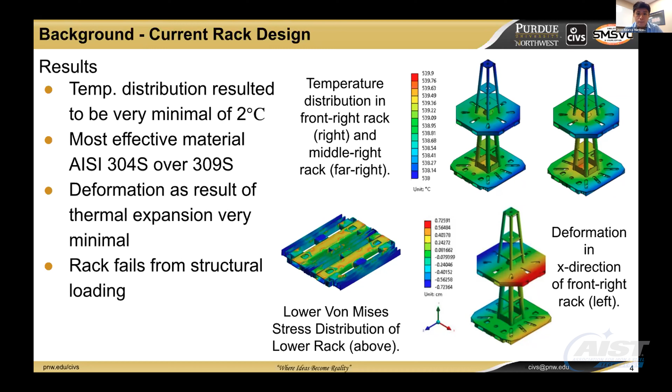The approach for this project was an iterative approach. We start out by doing research, literature, analyzing the models in order to identify the areas of improvement and consider the constraints of the furnace racks. We then develop ideas for improvement, followed by creating the geometry, generating the mesh, and applying boundary conditions.

Then we tested those ideas individually through thermal simulations and structural simulations, and finally did a fatigue analysis. We then examined how those ideas perform all together to create our final design and adjust changes based on the performance of each design.

The method used was brainstorming ideas after the constraints were considered. Some of the constraints included the size of the furnace. We did not want to make the racks taller, or we did not want to increase the weight of the racks because it will use more energy in the furnace.

So some of the ideas we considered was changing the hole distribution as seen in the figure on the screen. We considered applying a shaft structure to the top, changing the platform configuration, increasing the beam thickness, and yes. So now this method generated 12 design ideas, which led to 25 FEA simulations for each individual change.

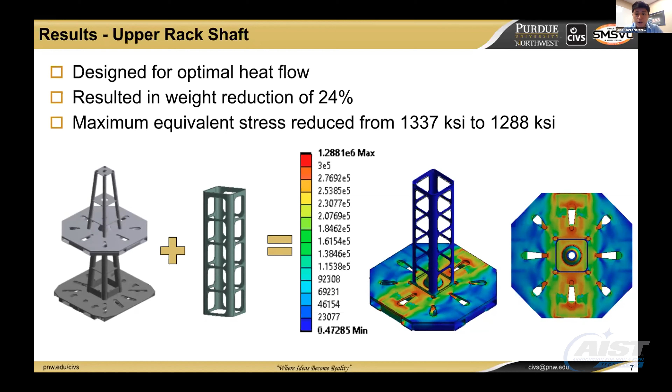Another design was changing the upper rack hole distribution. Now, this design also was focused on improving the airflow through the rack since it's at the top. This design resulted in a 1.8 weight reduction and reduced the stress significantly from 1300 KSI to 1100 KSI.

Another impactful design for the upper rack was adding holes to the lift beam. Now, adding holes was also intended to increase airflow. This did lower the weight of the rack by 2.5%. Even though it increased the stress, we're still reducing the weight and improving the rack overall.

Now I'm going to pass it over to my partner, Joe Madrigal, who's going to talk about the changes we applied to the lower rack.

Hello, everybody. So to continue on some of the ideas elaborated, one of the ideas we wanted to include was an increase in plate thickness on the lower rack. Now, we did do this with an additional 0.1 inches, but we found the relationship that as we increase the weight, the stress reduces. So weight increase is a problem because it increases the cost.

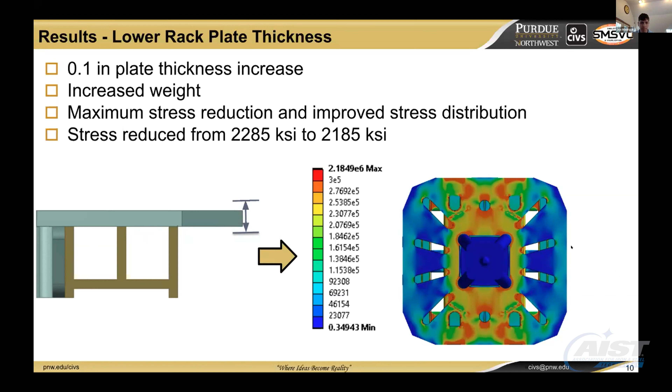And again, as elaborated before, we also added the hole in the lift beam idea to the lower rack, which did reduce the weight in the individual lower rack, just as it did for the upper rack, but it also decreased the maximum stress of the lower rack from 2300 KSI to around 2000 KSI.

And the last idea we also included was a change in hole distribution. We really made this idea to allow more heat flow going through the rack, as well as possibly allowing the stress distribution to be less concentrated. And even though it slightly increased the weight by 0.9%, we did have a very notable stress reduction, which essentially distributed the stress evenly in critical areas where failure is common, as reported by the engineers in the industry. And this change also reduced the max stress from around 2300 KSI to 2000 KSI.

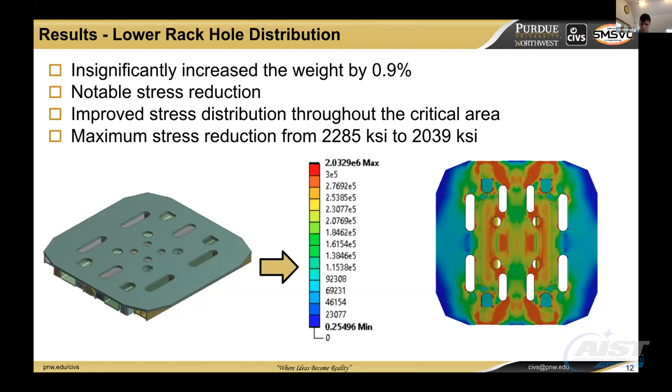And here we have just a summary of all the design ideas. What we did was, after taking all the design ideas into consideration and finishing their simulations, we determined whether they passed the criteria, which we deduced were the criteria for having the most effective design, again by approval by the engineers in the industry: the reduction in metal, the distribution of stress concentration, the reduction in the stress reading, and also, if possible, allowing for more heat flow, as shown in the images. In addition, more ideas are as follows.

But overall, we were successfully able to create a final design that allowed for more heat to flow through the plates, as well as distributing the stress across the racks, specifically the lower rack, which again is where failure commonly occurs. And in addition, we also minimized the weight, specifically in the upper rack, which again linearly affects the increase in stress in the lower rack.

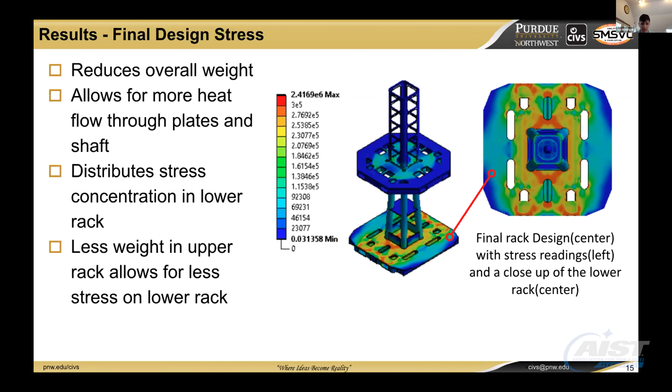And to perform a fatigue analysis, we wanted to see the performance across the entire rack for how many cycles each part would show before failure. Even though there are some areas, such as the corner of some holes that you can see in the lower rack to the left, there are some critical stress areas in the notch areas. But overall, compared to the original, this did have a significant cyclic increase to allow the rack to survive more cycles, broadly speaking.

But in conclusion, the students were able to successfully examine the original design on a part-by-part basis using finite element analysis. And after designing multiple design changes, we chose the best performing changes that made a suggested design for the industry. And this design was able to contain lighter mass, distribute dense stress areas where critical stress occurs, and allow for more heat flow to go through the rack.

Now, as for future work, we really recommend that some of the researchers that work on this project further potentially use a computational fluid dynamics simulation, which is a simulation that could show the heat flow throughout the rack, because in the actual furnace, the heat flows from the top of the furnace all the way through the rack down past the lower rack. So if that could be simulated, that would be extremely helpful.

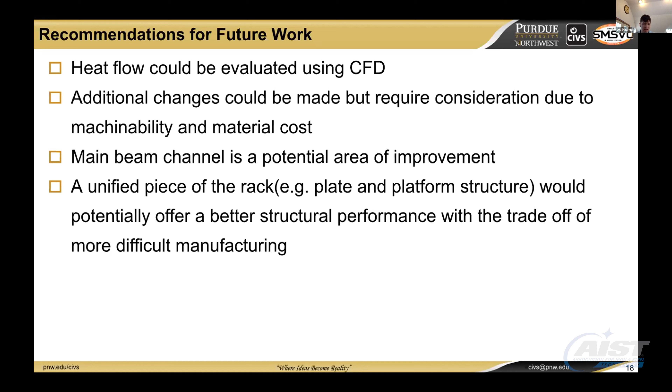And we also like to note that some ideas, such as a unified piece of the rack or the plate and the platform structure, showed that it potentially had an extremely improved structural performance, but the trade-off is that the manufacturing is going to be essentially more difficult with material costs, and just being realistic in that case.

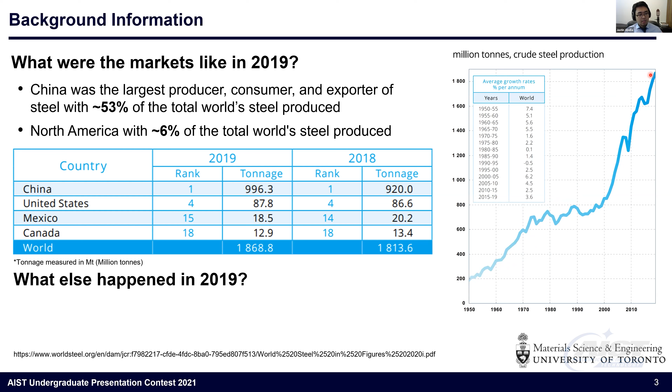On the right, you'll see a graph of the crude steel production from 1950 all the way to 2019. So from here, you see that as population grows, as projects begin to expand, the demand for iron and steel is obviously going to go up. Little bumps in the road, but you can see this ascending nature of the iron and steel market from 1950. But what else happened in 2019? December 31st, 2019, as you all know, the first case of COVID-19 was reported in Wuhan, China.

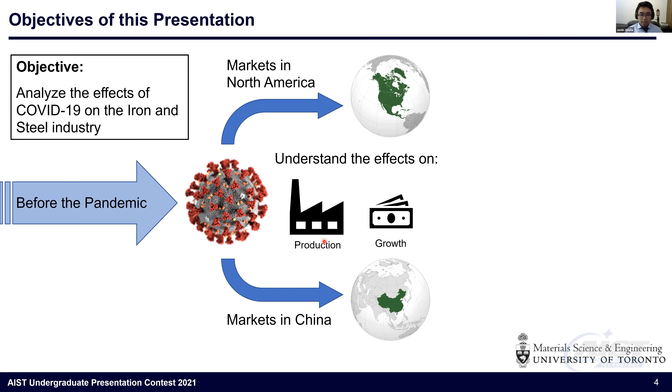So my objective of this presentation is to analyze the effects of COVID-19 on the iron and steel industry. I went over what it was like before the pandemic, talking about the markets before 2020. And obviously the virus had hit. Now I'll be going over the markets in North America and in China just to scope down a little bit. We want to analyze the effects on production and growth. And most importantly, how have the countrywide lockdowns affected steel production and growth? From there, I'll talk about the world scale, and then lastly, the future of the industry. And with that being said, let's move forward.

Start off with China. What was the production like in China? Well, there was a fall of production by minus 8.4% in February 2020. You can see this little dip over here. The average levels of 2019 were just about at this level before having a smaller little dip over here. But the full productivity of China had already recovered by April 2020 and is even higher than the 2019 levels. In terms of growth, there is a little bit of variability with a decline of 6.5% in February 2020, but by October of 2020, that has already grown to about 12% year-on-year growth.

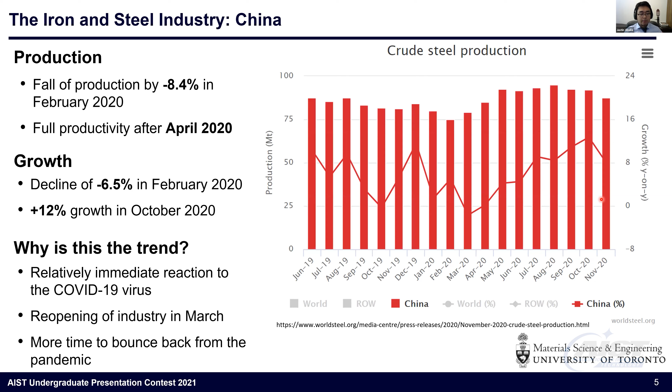Now you can ask yourself, why has China recovered so quickly? Well, if you recall from last year, China had a relatively immediate reaction to the COVID-19 virus. They shut down their economies and their country very early on in January and February 2020. This allowed them to reopen their industry in March, giving them more time to bounce back from the pandemic.

Now, comparatively, let's look at North America. What was the production like in North America? Well, you see there's a 33% drop in the second quarter of 2020. And I added this little table showcasing the 2019 and 2020 million tons of steel produced in that time. But more importantly, I want to bring your attention to the graph on the right.

Now, you see that the United States, being the bigger, the more impactful producer of steel in North America, you can see this obvious drop in March, April 2020. You can see this is the 33% drop. Now the growth here is a minus 15.7% decrease in year-on-year growth.

And again, you can ask yourself, why was this the trend? Well, a slower reaction to the COVID-19 virus delayed the openings of the markets, delayed the opening of key steel plants. There was also a sharp manufacturing recession in the US around the time, and companies like Ford and Honda closing their doors to prevent the spread, to encourage social distancing. This has caused that drop of iron and steel around this time.

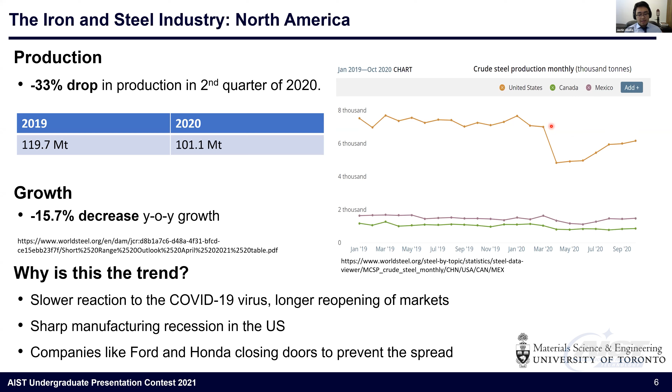I think it's important to note what the World Trade Organization is reporting around this time. You can see that global trade fell by minus 5.3% in 2020, hitting a low in Q2. It's obvious when you see this rising trend over here, versus this immediate fall in Q2 of 2020. But there's a steady increase, and I wouldn't even say steady, I would say a rapid increase after April 2020 in the third quarter of that year.

So you can see that trade has obviously been correlated to the iron and steel markets around that time, and this recovery is very analogous to the iron and steel markets. Now you can see this dotted line as the forecast, and it is also in this ascending pattern. So we can expect an early recovery from the iron and steel markets.

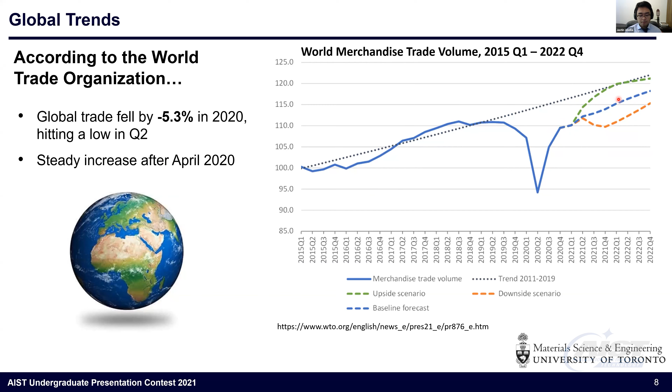So let's go over production again, this time on the global scale. There's a minus 2.8% decrease in production, and you can see this is clear with this drop from March to April. Just a little note that I have included the graph for the rest of the world, not including China, because China is such a large producer, such a large chunk. So it gives us a bit more perspective on the rest of the world if we don't include China in this map.

But again, as I was saying, there's this obvious drop in March to April 2020 with a steady increase after April, this steady, ascending nature. Now the growth has seen a minus 30% drop from February to April. Again, very obvious. Start from here, goes down, a minus 0.2% year-on-year growth at the end of 2020. But again, this ascending growth, and already at the end of the year, we see more of a positive year-on-year growth over here.

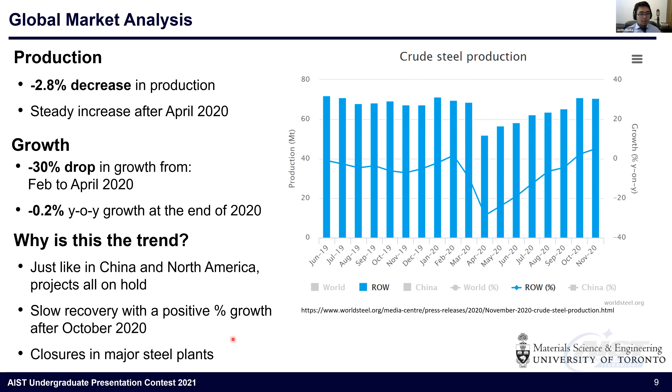Now, this is a trend as countries reopen their economies in the third quarter of 2020. We see a slow recovery with positive percent growth after October. But even so, there have been closures of major steel plants around the world. I've added a few of these steel plants that have closed their doors to encourage social distancing and to limit the spread: British Steel, Tata Steel, Nucor. But there are reports that in 2021 we will see a recovery in new capacities at companies like Nucor, Steel Dynamics and Big River Steel in North America.

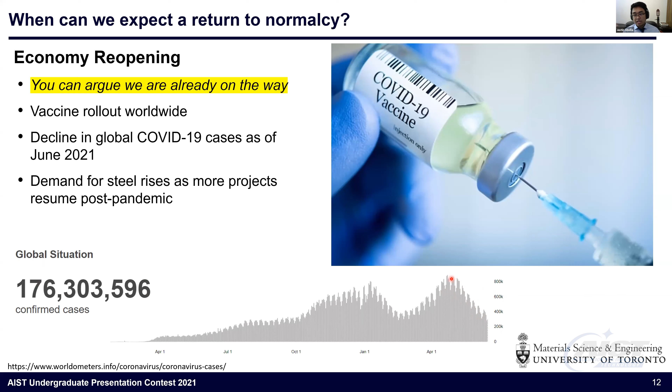So when can we expect a return to normalcy? Well, I would argue that we're already on the way. You've seen the rise in global trade. You see the rise in production and growth. As vaccines roll out worldwide, the world will continue to reopen, and global COVID-19 cases as of June 21 have been declining. Obviously this is a tragic event, but we are seeing a lowering of global confirmed cases. And with this, as more projects begin to open and resume post-pandemic, the demand for steel and later the production of steel will continue to rise again.

So with that being said, let's give a little bit of a summary of what I went over today. So in China, we have a max fall of production about minus 8.4% in 2020, a decline of minus 6.5% in year-on-year growth in February. But we know that because of these early lockdowns, markets reopened a lot quicker. That allowed them to produce steel at a more normal rate than the rest of the world.

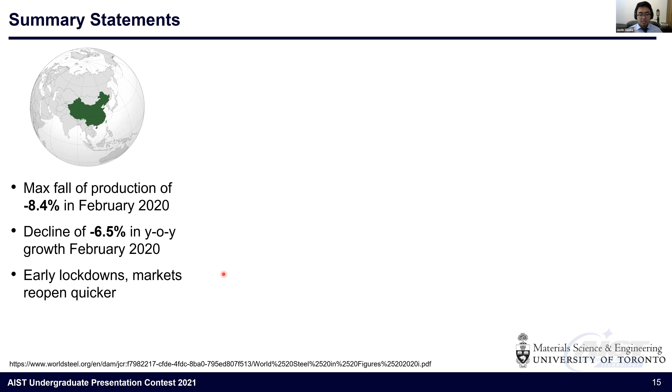In North America, we saw this 33% drop in production at the start of the lockdowns, and the recession in March caused much unemployment and closures in industries that require iron and steel, kind of lessening that demand for iron and steel. And obviously with lesser demand, there's lesser production. And the delayed lockdowns delayed the opening of the economy.

But on the world scale, we see a minus 2.8% decrease in global steel production, a minus 5.3% decrease in global trade. But with all of those graphs, we see a slow recovery in 2021 as markets begin to reopen again. So some key conclusions here is that the COVID-19 pandemic has obviously caused a decline, and that the industry is recovering as these sectors that demand iron and steel, such as construction and automotive industries, reopen their economies again. And we also have maybe a projected V-shaped economic recovery.

What does that kind of mean? Well, I'm going to bring up this sort of chart again, and this one is updated to 2020, not 2019. And you can see as population grows, the demand for steel grows, and there are always bumps in the road. It goes down, but it always rises back up. For example, right here is the 2008 financial crash with this dip, but obviously it goes right back up, this V-shaped recovery.

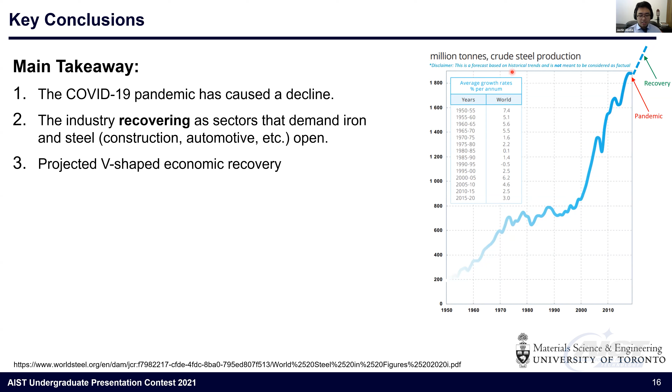Now right here, we can see this obvious little dip or this little stagnation, and it can be predicted that this stagnation is the pandemic, whereas the recovery, as it has been in the history of the human race, at least since 1950, will see a growth once again. And just as a disclaimer, this is a forecast based on historical trends and is not meant to be considered as factual.

And I just wanted to end off with a little saying from the Iron and Steel Mills and Ferroalloy Global Market, that the COVID-19 pandemic was obviously an unforeseen event that did halt the iron and steel industry. But these shutdowns are not at all related to any ongoing fundamental weaknesses in the market or the global economy. And we can see that with the growth, with the recovery of many of the regions around the world. And because of this, hopefully we will see the industry thrive once again.

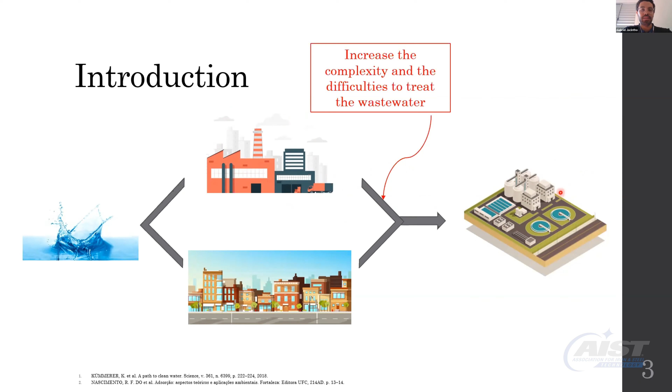It was common that a central sewage treatment plant was used to treat all the wastewater from the industries and from the cities. This is not good because the complexity of the industrial wastewater increases the difficulty to treat the water and release better quality water into the environment. In this example, the industrial wastewater is treated inside the plant and the final results are quite better.

Siderurgical industries use boric acid as a lubricant in the mechanical conformation process and chrome in electrochemical baths to increase mechanical resistance and avoid corrosion in the steel. Even after regular wastewater treatment, these substances can be found in trace concentrations in the treated water. Removing these trace concentrations is really hard and new technologies are necessary.

Chrome is well known to be carcinogenic when ingested, and it's bioaccumulative. In other words, after ingestion, it accumulates in the body tissues. Boron, for example, if it's in high concentrations in the soil, can cause deformations in plants and necrosis, and can even devastate an entire plantation.

To avoid such situations, governments around the world started to create laws and rules to better control the destination of wastewaters. In Brazil, for example, CONAMA, the National Environmental Council, limited the concentration of these substances allowed in the wastewater after treatment. Total boron is allowed only below 5 ppm. Trivalent chrome is allowed only below 1 ppm, and hexavalent chrome only below 100 ppb. The lowest value for hexavalent chrome is because this kind of chrome is known to cause carcinogenic effects.

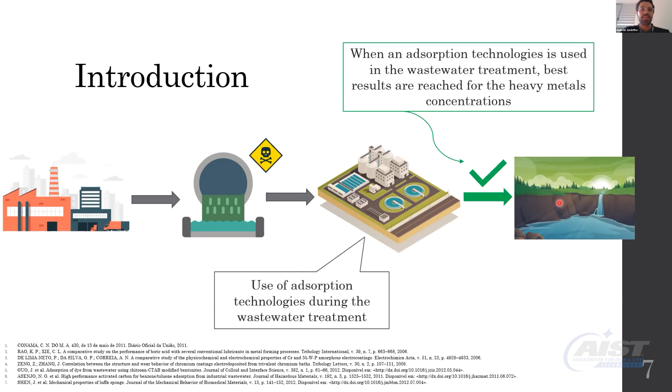Removing substances present in trace concentrations, as I said, is hard, and adsorption is a well-known method capable of such a thing. Here is an example of possible use of adsorption technologies for the treatment of wastewater. Inside the treatment plant, it's possible to use filters with adsorption technology to remove the trace heavy metals in the water and release that treated water to the environment. Here is a quick review about adsorption.

Adsorption is the interaction of a substance called adsorbate with the surface of a solid known as adsorbent. These interactions happen by physical interactions in the case of physisorption, where the adsorbate molecules get in proximity to the adsorbent, and then by difference of electric charge potential, they form multiple layers on the surface of the adsorbent. They can fill the pores too and get into the adsorbent structure.

But there is a possibility of chemisorption too, where a vacant binding site reacts chemically with the adsorbate and holds it in a unique layer on the surface of the adsorbent. It's possible that both kinds of adsorption occur. First, the adsorbate chemically reacts with the vacant binding site. Then, by physisorption, other layers can be formed and fill the entire pore.

The adsorption efficiency can be improved with treatment made on the adsorbent surface, a process that we call functionalization. One interesting property of adsorbents is that it's possible to recover the adsorbate through a process called desorption. Then you can use the same adsorbent again.

Adsorption with coal and clay is widely used. Even inside our homes, these materials are used, such as in water filters. This is an example of a clay water filter filled with activated coal to filter the water here in Brazil.

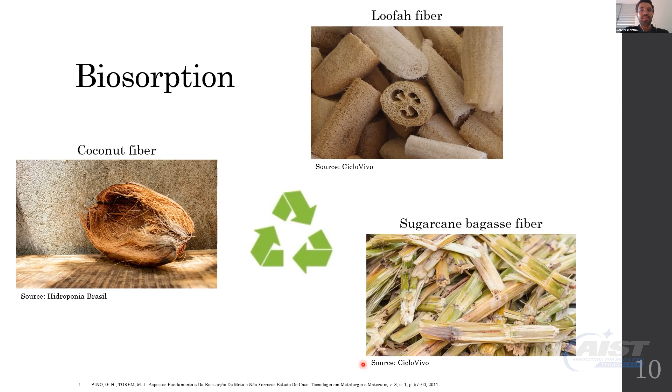In this example, coconut fibers were used to adsorb heavy metals present in water. Coconut fibers are composed of 23 to 43% cellulose and 35 to 45% lignin, and this composition is very important for the adsorbent characteristics.

A study of the zeta potential variation at different pHs was performed to evaluate the charge behavior on the coconut surface. At high pH values, the values tend to fall, showing that there is an accumulation of negative charge on the surface of the fibers. As you can see, the lignin and cellulose molecular structures have a great amount of hydroxyl groups.

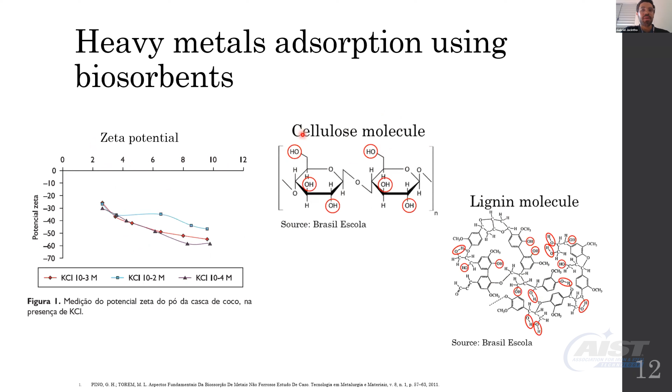These hydroxyl groups tend to lose the hydrogen at higher pH values and consequently stay with an unbonded oxygen with a negative charge. In theory, this negative charge should attract metallic ions present in wastewater to the fiber surface.

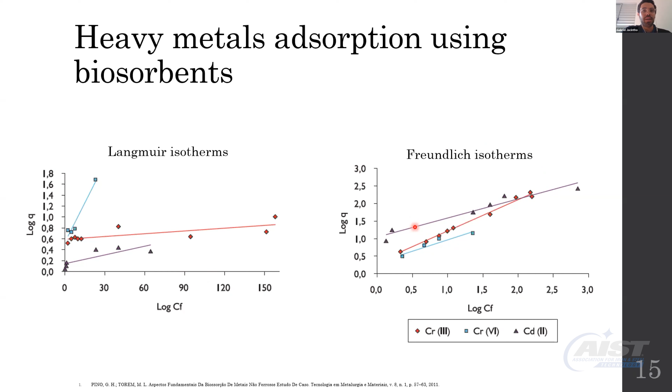Now, talking more about the loofah, principally the Brazilian sponge gourds, we found that the composition of the Brazilian loofah is close to the coconut fibers. The composition is based on cellulose and lignin. And these structures allow the surface chemistry to be changed, increasing the adsorption and selective capability.

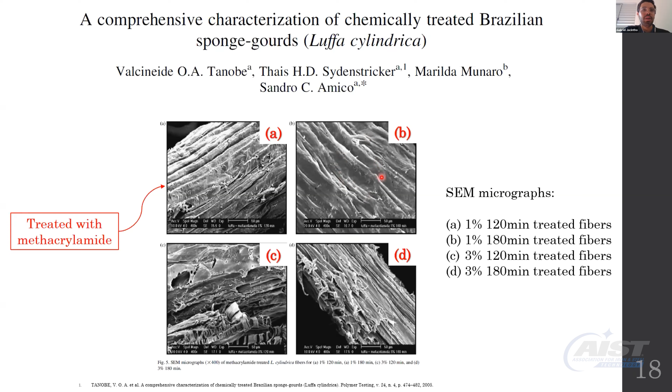And with low concentrations and 180 minutes of treatment, the surface of the loofah fiber starts to be smoother, which is good to attach another kind of chemical compounds in the surface to increase the adsorption capability.

The goals of this project are the functionalization of the vegetal loofah by the alkalinization and impregnation of citric acid to improve adsorption capability for boron and chromium of the steelmaking industries. So we plan to do the evaluation of the vegetal loofah adsorption capability in its natural state, the functionalization of the vegetal loofah by alkalinization, impregnation, and the characterization

and evaluation of the influence of the pH in the boron and hexavalent chromium adsorption. This last is very important because it's difficult to control the pH of the wastewater in the industries. So providing an adsorbent that's able to work in that pH range is very important.

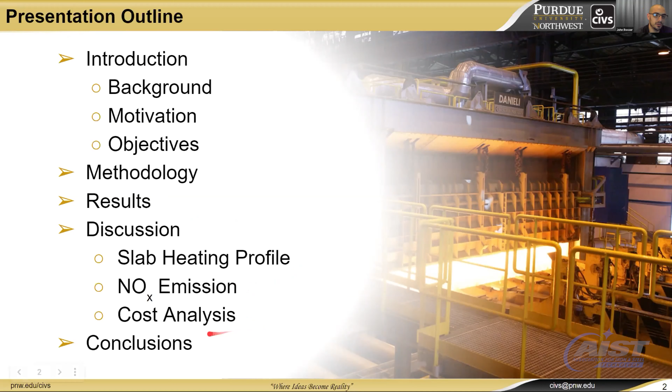Now, in 2019, the US steel industry created 87 million tons of steel, which equates to $92 billion worth. Our project focuses on the reheat furnace portion of the steelmaking process, which heats slabs so that they are more ductile so that they can be rolled down to the desired size. This is the second most energy demanding step, consisting of approximately 36% of the energy of the entire process, and equates to 24.5 megajoules per kilogram of steel.

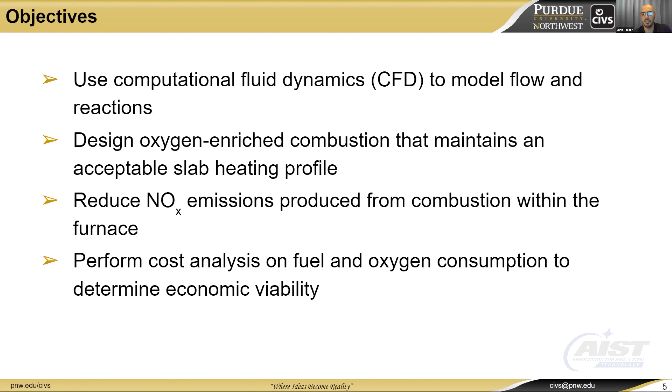We want to reduce NOx emissions produced from combustion within the furnace and perform a cost analysis on the fuel and oxygen consumption to determine the economic viability of oxygen enrichment.

We first started conducting the literature research that guided our decisions. We used ANSYS Fluent CFD software to create a 3D steady state model utilizing the K-epsilon turbulence, species transport, eddy dissipation, and discrete ordinate radiation physics models.

The geometry for our furnace was supplied to us from previous CIVS work. The slabs in this furnace are moved through the furnace by a walking motion of rotating arms. This makes this type of furnace a walking beam furnace. It has 5 zones: a preheat, heating zone 1, heating zone 2, intermediate zone, and soaking zone.

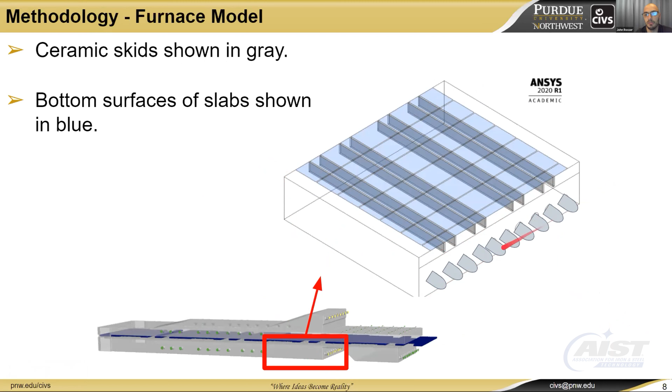My partner and I focused on modeling the bottom intermediate zone of this furnace. The ceramic skids that the slabs rest on are shown in gray, and the bottom surfaces of the slabs are shown in blue. The tabs along this portion of the furnace represent the location of the burners.

We placed oxygen ports in between the burners because the existing burners cannot be modified. And geometrically it made sense to place them in between the burners so that we could try to have even heating of the slabs. The port size is dependent on the oxygen enrichment and fuel percentages.

Oxygen is also injected at sonic speed because we want the reaction to take place deep into the furnace and away from the burners. And we also want to keep our oxygen fuel ratio constant. Now, these constraints are important and determine the diameter size of the ports. So my partner and I created a MATLAB script to calculate the diameter for any given oxygen enrichment percent and fuel percent.

So we studied 8 cases. The first case is a baseline case, and the cases are defined by the O2 mass percentage of oxidant and the mass percentage of the original fuel. So in case 1, the baseline, 21% O2 mass percentage just represents that we're injecting air into the furnace. 100% means it's 100% of the fuel compared to the baseline.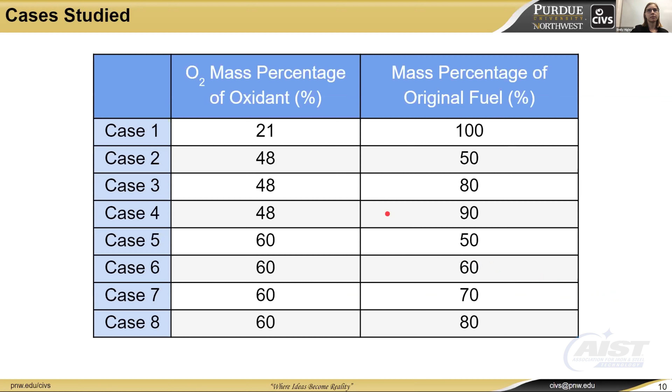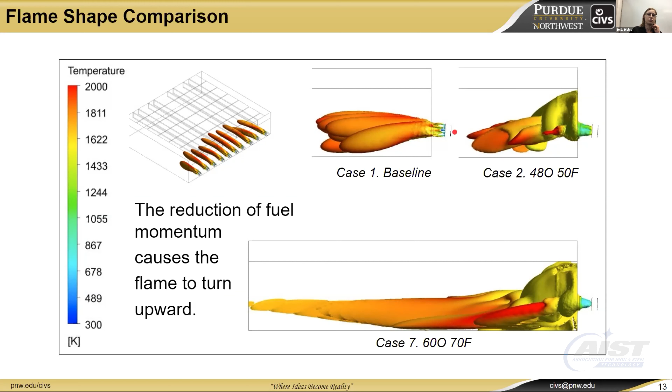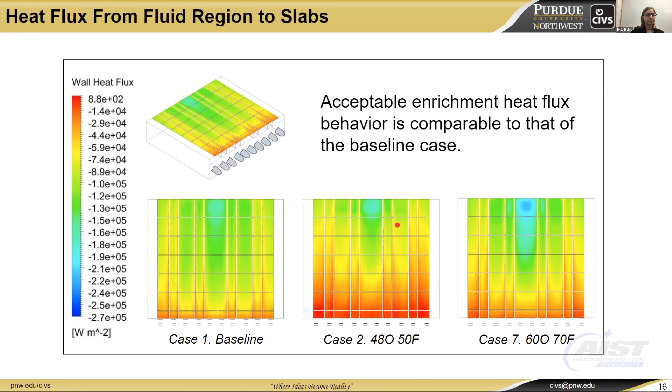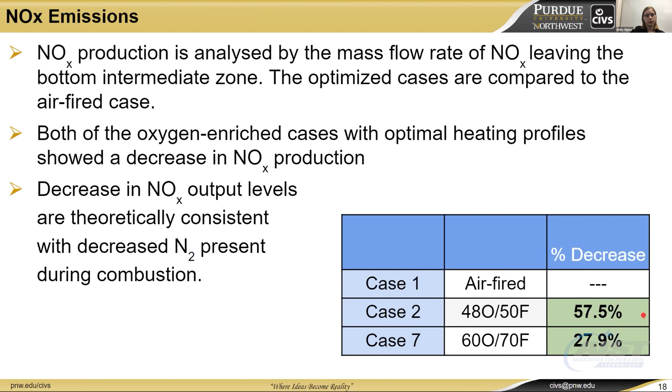So for NOx emission, the main thing to note here is that for oxygen, a larger percentage of oxygen is included in the oxidant relative to nitrogen, which means that there is less potential for NOx to be produced simply because there is less nitrogen. And as we can see, based on our simulations, less NOx was produced in both cases 2 and 7, with the greater decrease occurring for the lower enrichment level.

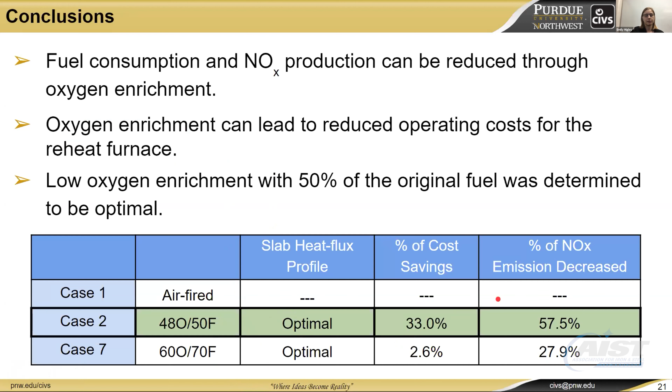And this table summarizes cost savings and NOx emission decrease so that we can see that the low enrichment case was found to be optimal based on our simulations. So in conclusion, fuel consumption and NOx production can be reduced through oxygen enrichment, and this can be conducted in an economically viable manner. And lastly, based on our simulations, the optimal approach to this is a low enrichment level with 50% of the original fuel, leading to an estimated 33% cost saving and 57.5% decrease in NOx emissions.

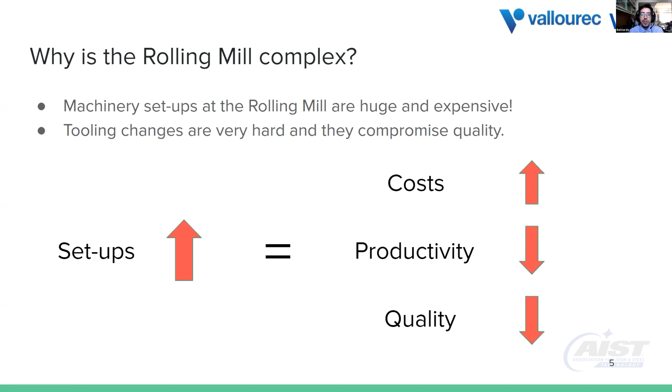So am I really saying that we're going to use Charles Darwin, balls and arrows, computer programming, and ourselves to create this result in one of the most challenging environments in the company? Well, yes, and now I'm going to show you how.

So the first thing we should be aware of are some specifications of the seamless steel tube. Some of the main visible specifications of the tube are its length, of course, its outside diameter, which I'll call OD, its inside diameter, which I'll call groove, and the wall thickness, which is the difference between the OD and the groove. The OD and the groove will be the most important specifications for us, and they will impact directly our result.

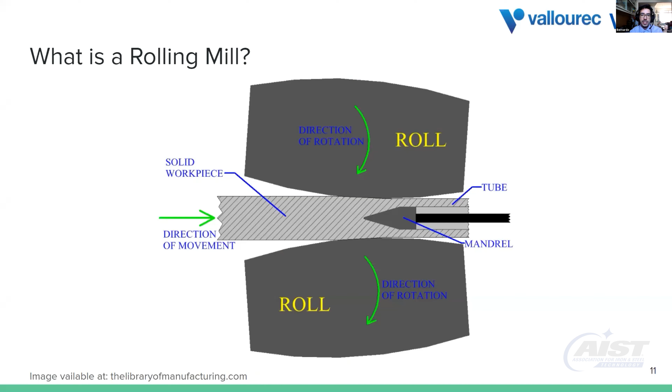In the rolling mill, there are those very important and also very expensive tools called stands. The stands are tools that come outside of the tube to maintain its position, and they are specific to the OD and to the groove of the tube. Meaning, every time we sequence consecutively two orders, two tubes that don't have the same value of OD or the same groove, then we have a huge setup. We have to change the stand, and we lose all its remaining lifespan.

So every time we talk about sequencing consecutively, we're talking about production scheduling. Production scheduling happens when we have a make-to-order approach in which all orders shall be scheduled, let's say in a month. So the task is to determine the best sequence of orders to be processed.

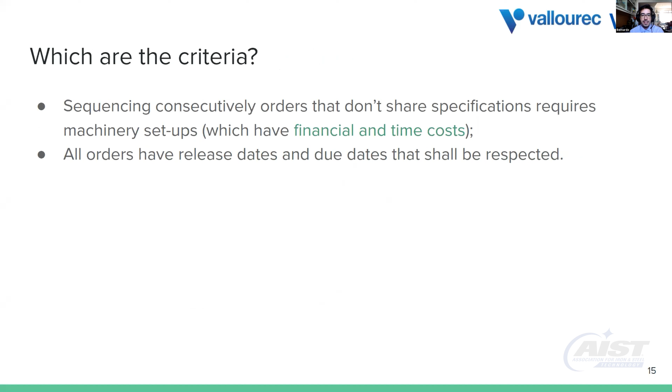But what is it that determines which sequence will be the best? Which are the criteria? Well, sequencing consecutively orders that don't share specifications requires machinery setups. As I've said, machinery setups have financial and time costs. But the thing that really complicates our situation here is that all orders have release dates and due dates that shall be respected.

So let's take a look at some balls and arrows, as I've called them, or nodes and edges. Let's imagine that we have two green nodes that represent the orders O1 and O2. They have an outside diameter of X. And let's say also that we have two yellow nodes, O3 and O4, that have a different outside diameter, let's call it Y. So if we sequence those nodes in this manner, O1, O3, O2, and O4, every time we change the color in a sequence, we have to make a setup. We have to change the stands and change lots of other specifications of machinery. So we have three setups in this case.

But if we rearrange the nodes in this manner, O1, O2, O3, and O4, we bring together those which share color or the outside diameter or the groove, some specification. Then we only have to do one setup. So this is good for us.

And the same is true for the case of the tools. If we use the previous sequence, O1, O3, O2, and O4, we have to use 4 different stands, one for each order that we sequence. And then we'll lose 4 remaining lifespans. Each time we change a stand, we lose all its remaining lifespan. But if we, again, bring together those nodes with the same color, then we will only use 2 stands, one for each color, and in the end, we only lose 2 remaining lifespans.

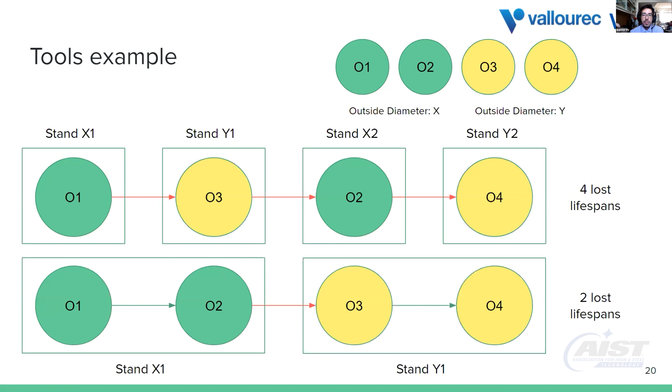But as I've said, the due date is really what complicates our situation. Let's imagine that each order takes a day to be processed, and we have the following due dates. The green nodes are due on day 4. And the yellow nodes have tighter due dates: day 1 and day 3. So if we schedule these orders in this manner, we'll respect the setups and the tools requirements. We'll have the optimal solution for them, but we won't be respecting the due dates of the yellow nodes.

If I change the way we order the colors, we can produce the yellow nodes first. They will respect their due dates, and also the green ones will respect their due dates. But that's not quite what happens in reality. It is far more complicated than that. One example: imagine if this O1 green node doesn't have day 4 as its due date. If it has day 2 as its due date, then it is simply impossible to get the best setup scenario and respect the due dates, because I want to do O3 on day 1 and O1 on day 2. But if I want to optimize the setup, then I want O4 to be close to O3. And this happens a lot of times.

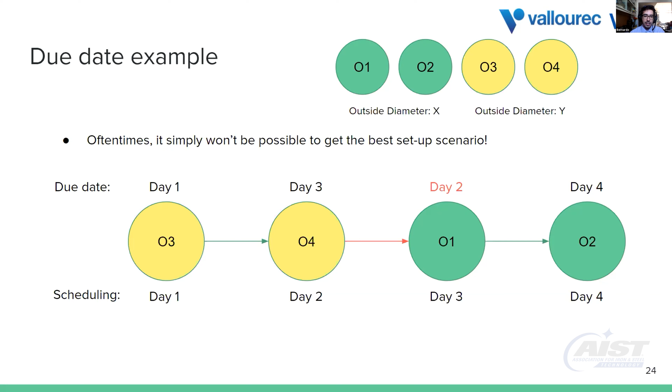If we take it to 20 orders, then there are 20 factorial possible solutions and something like 10 raised to 18 final options, which shows that it is completely impossible for us human beings without computer aid to evaluate every single order and choose the best. So the million-dollar question is, how do you find one solution in 10 raised to 18 or more? Well, the answer is optimization. What is optimization and how do we do it?

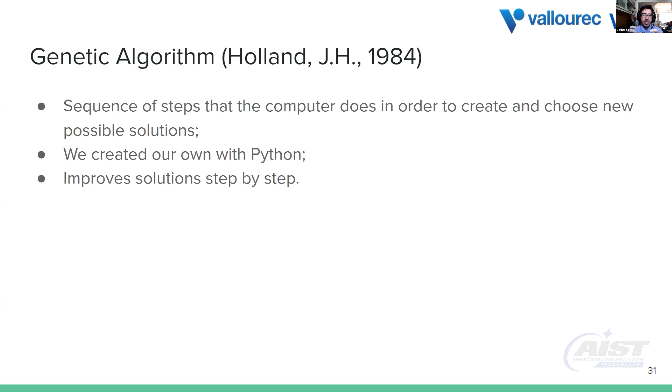Optimization is, by definition, the action of making the best or most effective use of a situation or resource. In our case, it means finding the schedule that minimizes production costs and setup times while respecting due dates. And as we've seen, those are sometimes conflicting objectives. And we do it nowadays through a genetic algorithm, or GA. The GA was first developed by John Holland in 1984, and it is simply a sequence of steps that we tell the computer to do in order to create and choose new possible solutions. We created our own GA with the Python programming language, and even for a computer, it is impossible to look at 10 raised to 18 possible solutions or more and choose the best. So we get some good solutions and we improve those solutions step by step.

The GA is called genetic because it simulates the process of natural selection proposed by Charles Darwin. First of all, we have fitness. We randomize some good solutions, and then each solution is evaluated, meaning we calculate how much time and costs it would imply if we actually took it to production. Then we rank those solutions based on this fitness and make the selections.

The best solutions will survive to the next phase, which is the creation of the offspring. The offspring is created by mixing and randomizing parts of old good solutions. This loop goes on and on, and after many iterations, a near-optimal solution is found. Currently, we have a 10% average gap to the optimal solution, which for our situation is quite great.

So how does the GA look visually? We have some individuals, which are possible sequences of the orders that we can bring to production. Every one of them is evaluated, meaning we calculate the fitness: how much setup time we would have if we sequenced the orders in this manner, and how much tool cost we would have. Then we rank those solutions based on the fitness and some weights.

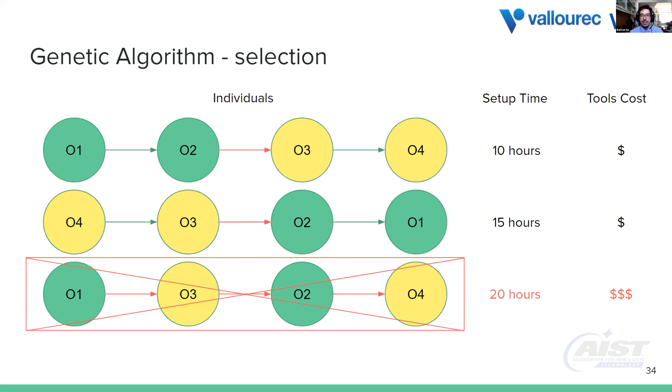The worst are discarded and the best are kept for the next phase of the GA, which is mating and offspring. We take two of the old good solutions at a time, mix them and randomize just a little bit to create new non-identical solutions that we call offspring, which will be part of the next generation, and the loop goes on. After many iterations, the best solution goes to production. And this is the optimization of the production scheduling in a seamless steel tube rolling mill plant.

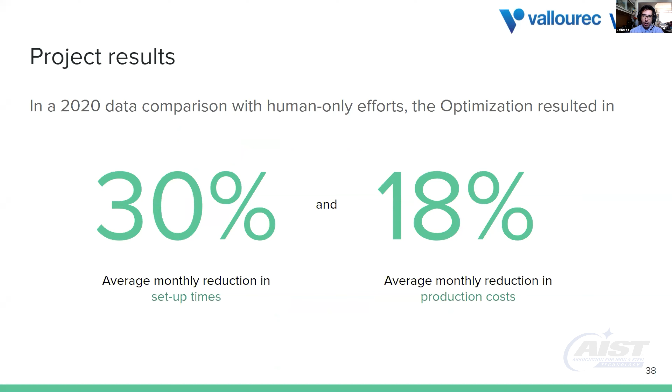The project results up to today: in a 2020 data comparison with human-only efforts, the optimization resulted in a 30% average monthly reduction in setup times and an 18% average monthly reduction in production costs. So yes, Charles Darwin, balls and arrows, computer programming, and ourselves, we've done it.

The next steps are mainly keeping track of expected versus reality in monthly schedules and making small improvements in performance. They are important for the user experience. And of course, expanding to other production lines. Nowadays, at Vallourec, we also have this system for the steel plant, but there are many others that can benefit from this optimization strategy.

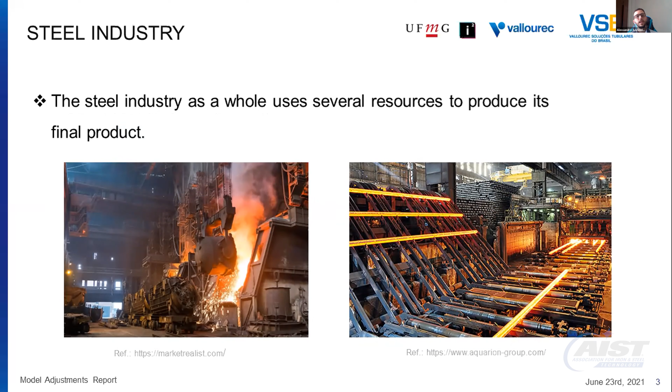One of the main points of focus of this project is on saving resources, reducing the consumption of key resources like water, gas, energy, and fuels in general. With each passing day, we increasingly have a need for production quality assurance, whether in our production process or in solutions we will deliver for better customer use. In the industry, we have teams totally focused on digital solutions and interconnected with the quality sectors to deliver the best final product.

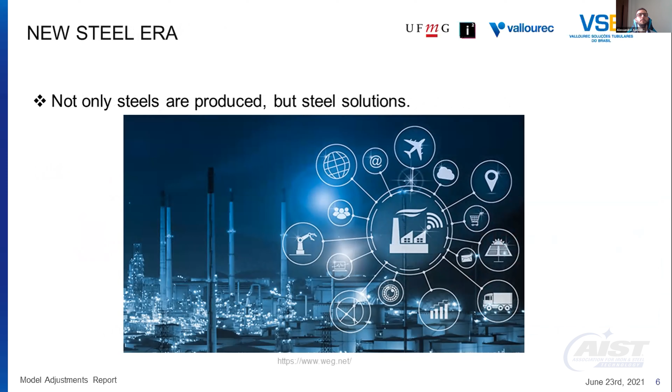This same industry is also experiencing a new steel era in which not only steels are produced, but steel solutions. An increasingly present trend in the industry context is artificial intelligence. Technologies like machine learning, data models, and mathematical models are increasingly helping the operators to run the process. An example is the mathematical model. But what is a mathematical model? The mathematical model is a simplified representation or interpretation of reality, which follows a structure of mental or experimental concepts. They are used worldwide in a lot of processes, and for sure in the steel industry.

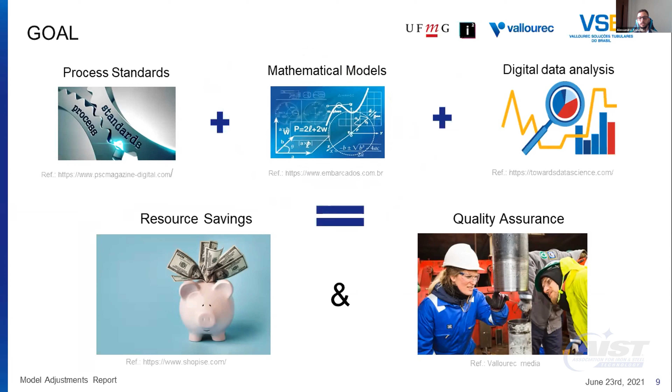Speaking about the goal of the presentation, with mathematical models used in the steel industry context, with standards that can be defined worldwide or by specialists from each company, and with sensors to guarantee the process reliability, we can generate process improvements. To explain the previous slide better, with process standards plus mathematical models and digital data analysis, we managed to save resources and generate quality assurance, generating different types of gains for companies in the entire environment in which they are inserted. Related to the approach, my proposal was to develop a digital solution for comparing real data with data estimated by the models.

Speaking about my personal challenge, I had a lot of college learning. I learned how to program, I learned about databases, about instrumentation, about communication between different systems, and frameworks to help manage tasks like Scrum. And at Vallourec, I had the opportunity to apply all these concepts and for sure learn more about the steel industry context.

In this project, the mathematical model named Sofia generates a standard heating curve. This curve is so important because it is the real-time reference for the operators. As shown in this image, the objective for the pipes is to be as close as possible to the curve. The blue dots are the aimed temperature that the model calculated in the specific position, and the green ones are the estimated temperature for that position.

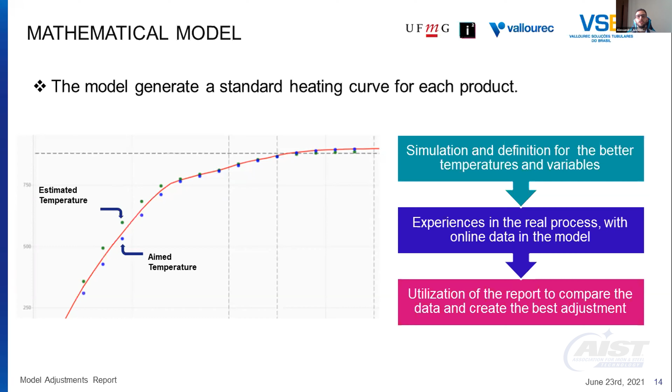To summarize the flow of the model, I summarized the steps in the chart. First, we have the simulation definition for the best temperatures and variables. Second, we have experiments in the real process with online data in the model. And at the end, we have the utilization of the report to compare data and create the best adjustment.

Speaking about the standards, for this project, the Vallourec heat treatment community members helped me to define the best standards because they know a lot about the process and they know how to create the best solution for the clients. The senior engineers helped me to create the min and max deviations for the temperatures, the limits for soaking time, the way to compare the curves, and which type of material will be compared with this report.

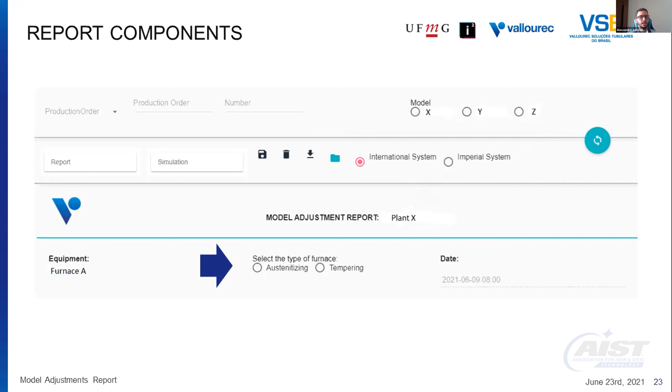We have the specification of the plant and the equipment, and you need to select if you want to compare an austenitization or a tempering furnace, because they have different limits. And you can select if you want to use this thermal cycle as a base or as a verifier.

We have a lot of information for the tube that you are comparing, like the production order, the date, the steel grade, and you have a summary with the temperature deviations between the model and the real process.

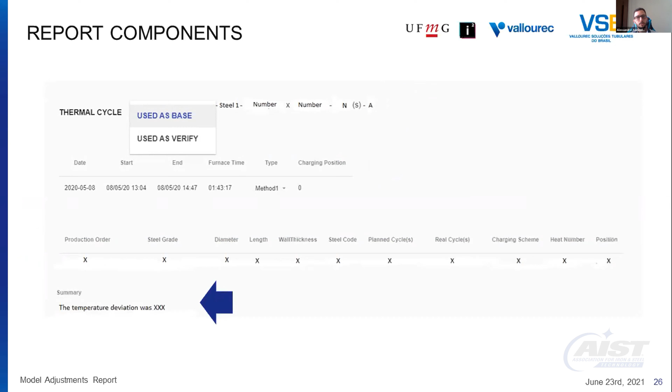The most important part of the report is the graph, a graph with a real tube trend calculated by the model, a simulation tube trend, a trend with data from sensors, furnace profile, roof and floor, limit curves, adjustment constants, and soaking temperature.

Here we have an example of this report. First, we have the adjustment constants. For this report, we have two different zones, the heating zone and the soaking zone. And these first curves are the reference curves. We have the furnace profile, soaking temperature, upper limit, and lower limit.

Second, we have the roof curve, the floor curve, and the simulation curve. After that, we have the real tube trend, the Datapaq channels, and the average between these two channels. And at the end, we have the difference curve related to simulation, the real tube trend, and the heterogeneity curve. The difference curve is used to show these adjustment constants.

Talking about the future work, the report is being validated and will be used in all plants in the group that use the model. In the future, the idea is to apply this report to other models to ensure quality even in different plants. To conclude the presentation, it is important to say that now the senior engineers have a complete solution to help them make the best decisions, generate process improvement, quality assurance, and save resources.

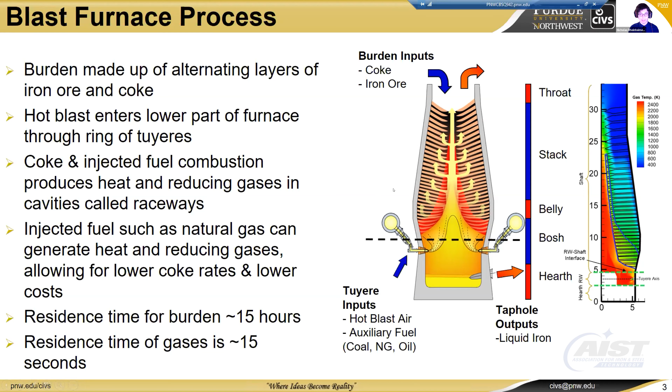The residence time for the burden in the furnace is anywhere between 10 and 15 hours, while the residence time of gases is only between 10 and 15 seconds. So the blast furnace is the largest consumer of energy in the entire steelmaking process, which is mainly why we're focusing on trying to streamline the process and making it more cost effective.

So the objective for this project is to develop a method to take blast furnace simulation data to produce quick and accurate results of conditions, and then to present these results in an easy to use interface.

So current CFD predictions indicate that it's possible to push additional natural gas while maintaining constant RAFT and top gas temperatures. The natural gas preheat will increase the RAFT, and it also reduces the predicted coke rate. This right here is our baseline case with no natural gas preheat and our standard natural gas injection rate. If you combine increasing the natural gas injection rate with preheat, you can see we can keep nearly identical RAFT and top gas temperatures with a lower coke rate per ton of hot metal, resulting in $9.8 million in annual savings.

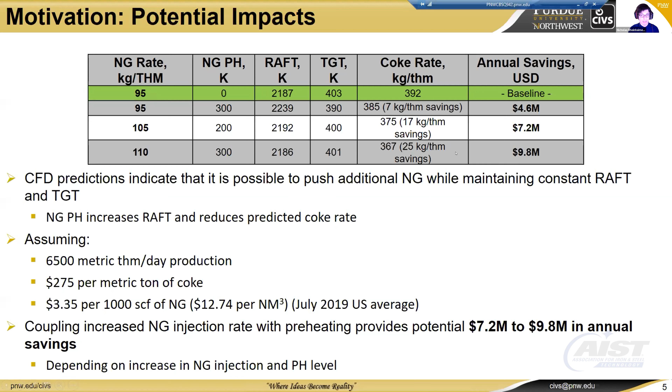So the methodology for our project can be split into two main parts. First, our CFD models, and then on to the interpolation model. The first step is the tuyere, which takes care of the iterative raceway shape, the coal combustion, coke combustion, gas combustion, and heat radiation. And then after that's finished, we move on to the shaft models, which gives us most of our output variables, such as the iterative method for calculating coke rate. And then once we have that data set, we can move on to the interpolation model.

So the way the interpolation model works is we take two values for each input condition from the data set, and then we arrange every combination of the chosen input conditions into a matrix with known outputs. The matrix is then solved using linear algebra to find coefficients relating the input conditions to the outputs, and then the coefficients found from solving the matrix can be used to form an equation that can be used to predict values for input conditions not listed on the data sheet.

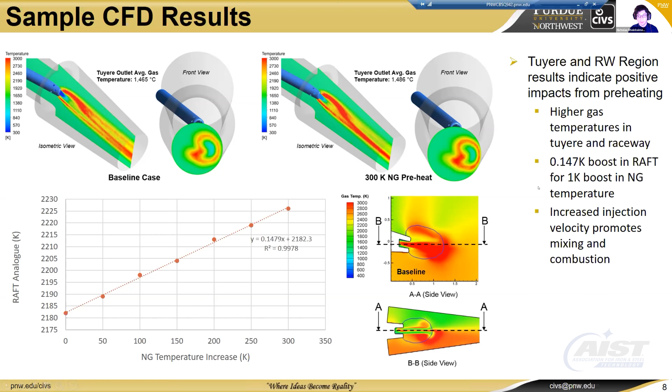Here we have some sample CFD results from the tuyere modeling. This deals with a single variable, in this case, the natural gas temperature. And you can see that we do gain positive impacts from preheating. This results in higher gas temperatures in the tuyere and raceway, about a 0.147 Kelvin boost in RAFT for a 1 Kelvin boost in natural gas temperatures. Heating the natural gas results in an increased velocity, which promotes better mixing and combustion.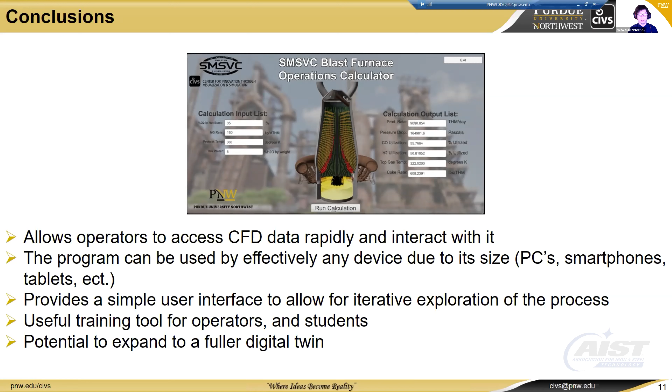So for future work, we would like to include further simulations of the new blast furnace technologies. Our software does lend itself to long-term use, as most of it is based on being able to input different data sets of your choosing to simulate different blast furnaces. We want to allow for user-defined variables and outputs, so you can choose exactly which variables you want to change and how many. And we would also like to incorporate a numerical optimizer.

We have a numerical optimizer, but it only exists in the command line version written in C++. This version was written in C# for better compatibility with the GUI. And we'd also like to develop an interpolation model for the CFD-generated contours shown in the tuyere modeling and the shaft modeling.

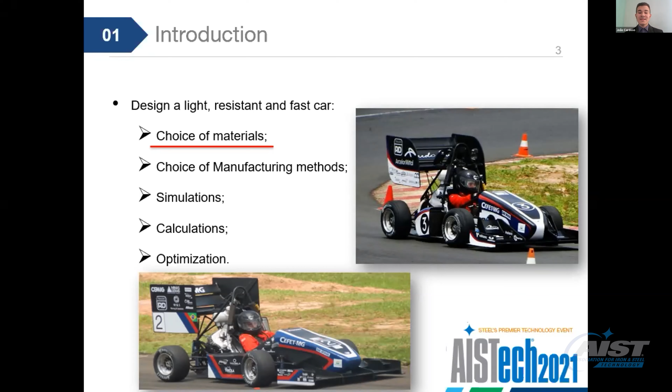So, the motivation of the research is to investigate the failure of the wheel hub, a part of the suspension system of the car. This component connects the wheel to the suspension. So, of course, it's a critical part and must be reliable. Since this is an important part, it requires a lot of simulations and calculations to guarantee the reliability during the season, the tests, and the competitions.

So we carried out structural, fatigue, and dynamic simulations of both the separated part as well as the whole suspension system. But despite all the calculations, the front wheel hub broke during a test much earlier than we were expecting. And this fact motivated the team to investigate the failure.

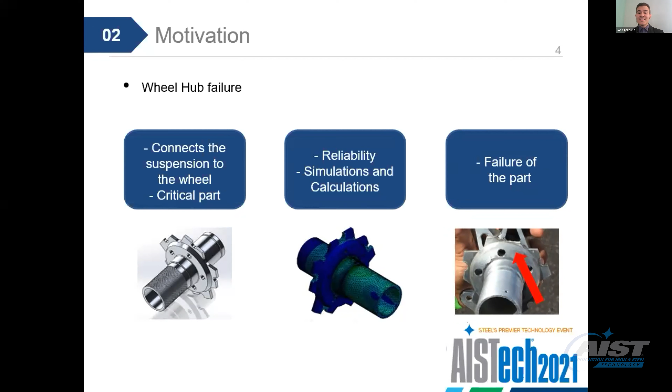So to solve this question, first, it's important to emphasize the material that was chosen to manufacture the part. We chose a special aluminum alloy 7075 T6, which can achieve great values of tensile strength and yield strength, and of course has low density. The code T6 means that it's a heat-treated alloy with precipitation hardening. And this is very important because, as I said, we need to manufacture a light and resistant car.

Secondly, the material is quenched, normally in water, in order to freeze the supersaturated solution. And finally, the alloy is subjected to artificial heat aging at around 120 degrees Celsius for some hours, which allows the formation of fine precipitates. And these precipitates block the movement of the dislocations, forming a high-strength alloy.

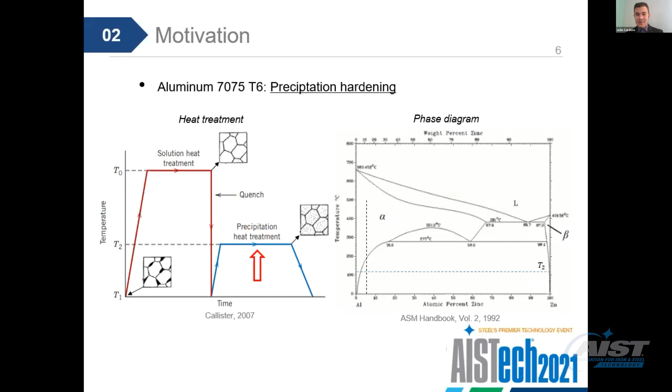So getting back to the problem, a hypothesis to explain the possible cause was the thermal influence caused by the brake discs. I will explain. The brake discs are the components that use friction in order to stop the car's movement. And this friction releases a lot of heat right next to the wheel hub.

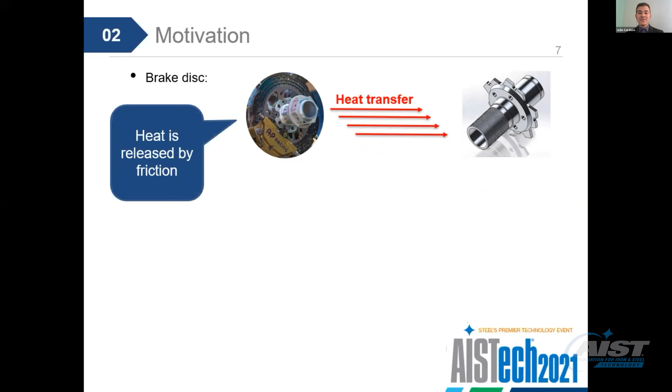So to study the thermal effects, first, of course, we need to measure the temperature. So the team installed thermal sensors on the surface of the wheel hub during tests of the vehicle. Another important point is the time that the alloy is exposed to the high temperature. So we measured how long the car moves during the test day using the GPS of the car.

And to evaluate the thermal effects, the team used the design of experiments technique to plan tensile tests. Initially, tests were carried out with the material at room temperature in order to determine its mechanical properties, such as yield limit, tensile strength, and elongation.

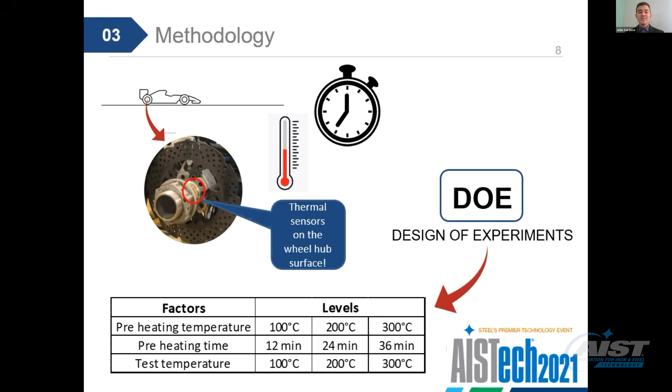And then we planned tensile tests considering the three most important variables with their respective levels, according, of course, to the measurements. So these variables were the preheating temperature with levels of 100, 200, and 300 degrees Celsius to simulate previous runs to which the wheel hub might have been subjected. Similarly, the preheating time of 12, 24, and 36 minutes. And tensile test temperatures of 100, 200, and 300 degrees Celsius to simulate a possible failure during a run.

So to carry out the tests, the tensile samples were machined according to the ASTM norm, and the machining operation was done at CEFET-MG, my university. And the tensile tests were carried out at the Mechanical Testing Laboratory of the Nuclear Technology Development Center, the CDTN, located in Belo Horizonte, Minas Gerais.

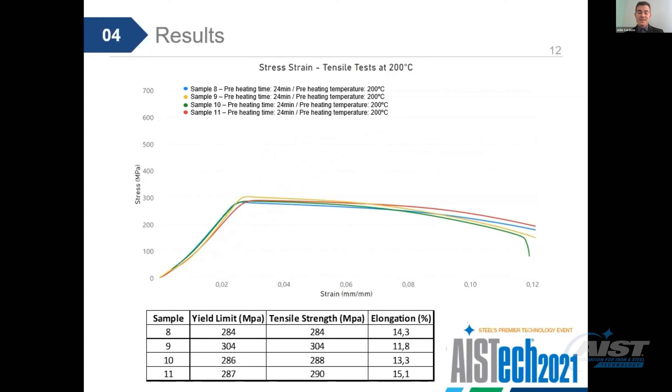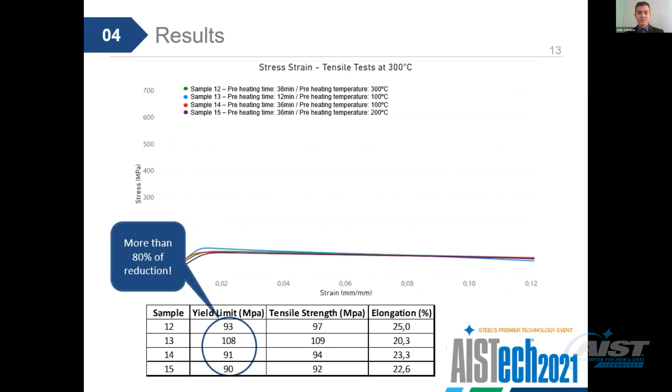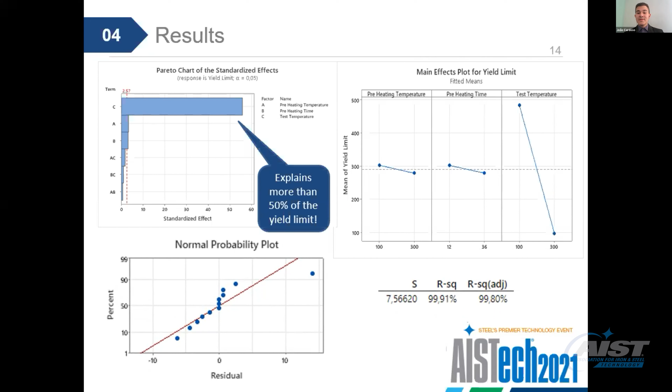The other graph shows the influence of the variables directly on the yield limit, and this visualization also allows us to conclude that the test temperature is really the main variable. These results show that the model is statistically significant, and we can see it through the R-squared and adjusted R-squared. These values are really close to 1, which means a good model. And as you can see in the normal probability plot, most of the residuals are close to the normal line.

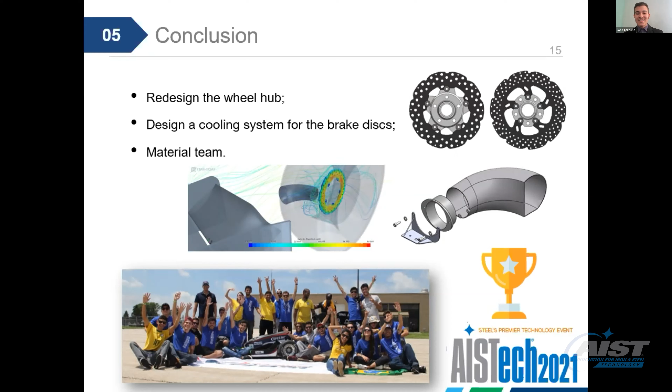And finally, a picture of the team celebration, only to show that the students solved a complex engineering problem using the principles of metallurgy. It's also important to emphasize that the team won the 2018 Brazilian national competition, and this project certainly helped to achieve this wonderful result.

So, as suggestions for future research, it would be great to increase the number of experiments and the range of variables in order to guarantee a complete study of the thermal influence. To complete the mechanical properties analysis, it would be necessary to study the fatigue of the alloy and the thermal influence. Another important suggestion is to reproduce this type of study in other materials and test other types of materials to manufacture the wheel hub.